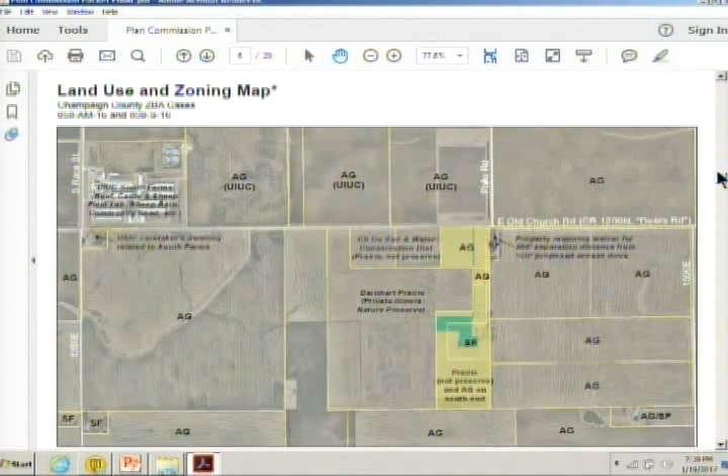It's worth noting that back in 2002, when the properties were subdivided amongst family members, the parcels involved belonged to two different family members, both listed as petitioners: Donald Barnhart and Amber Barnhart. The properties were split without a required subdivision submitted to the city, so there are issues of two of the parcels not being...

compliant with the city's subdivision ordinance. One parcel is too small; it's only 1 acre. It must be at least 5 acres, and it is not accessible to a public right-of-way. The same goes for that larger property that looks like a jigsaw piece, extending around the flag lot. That parcel also does not have frontage along a public right-of-way.

So the city has been working with county staff, as well as the petitioner, to ensure that a proper subdivision will occur in the event that the Champaign County Zoning Board of Appeals approves any rezoning or special use permit. The ways to remediate the non-compliance would be to make that one parcel larger, or by simply combining it with another parcel so all parcels are at least 5 acres, and possibly combining them so they all have access to frontage along Old Church Road.

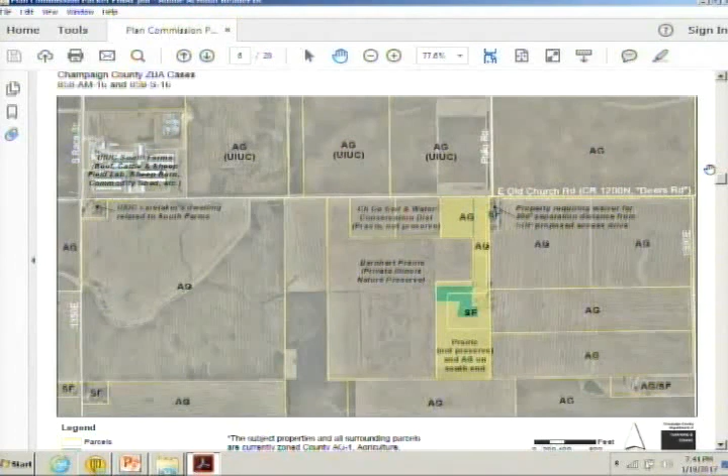All the subject properties and surrounding property are zoned County AG1 agricultural. The petitioners are requesting to rezone the subject properties to County AG2 agricultural. The distinction is that County AG1 is strict agricultural use, designed to allow things like farming and open space.

AG2 is meant to allow more commercial type uses on agricultural properties that are, make no mistake, of a rural nature, such as an event center or a farm supply store or things of that nature. So rezoning to AG2 would open the properties up slightly more to other commercial uses. The reason the petitioners are requesting the rezoning is because the use they would like to propose, which under the Champaign County zoning ordinance is determined as private indoor recreational development and outdoor commercial recreational enterprise, is only allowed in AG2 as opposed to AG1.

So they submitted a map amendment, rezoning application, as well as a special use permit application, to be heard concurrently, with the special use permit to be approved only after the rezoning application is approved at the same meeting.

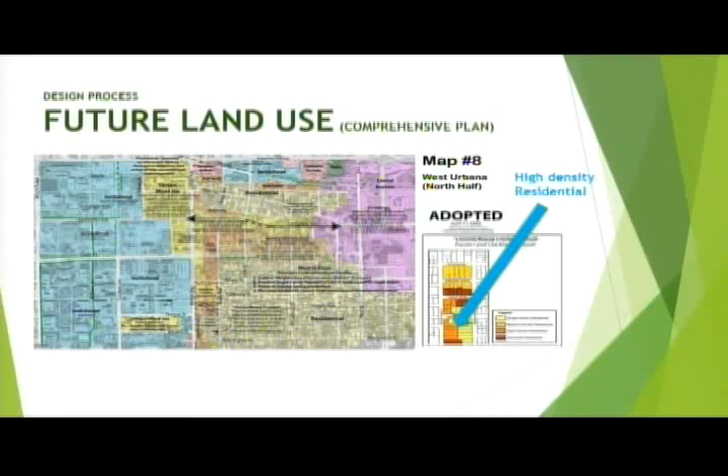At the same time, this neighborhood, or the location of this particular property in relationship to the greater neighborhood, this is a neighborhood that...

is also talked about in the comprehensive plan as needing to have its character preserved. And the character that is there is one of lower density.

It's not a high density area, and so we have these forces kind of coming together, where we have a tendency for there to need to be some sort of transition...

between the campus area and the lower density residential area. And of course, this property is right where those come together. So there are some challenges.

So what we have tried to do is to keep all the concerns in mind, not only for the developer but for the neighborhood people and the city.

So there are several things we had to balance with this, but what we're presenting is our best effort to try to keep all of these things in balance.

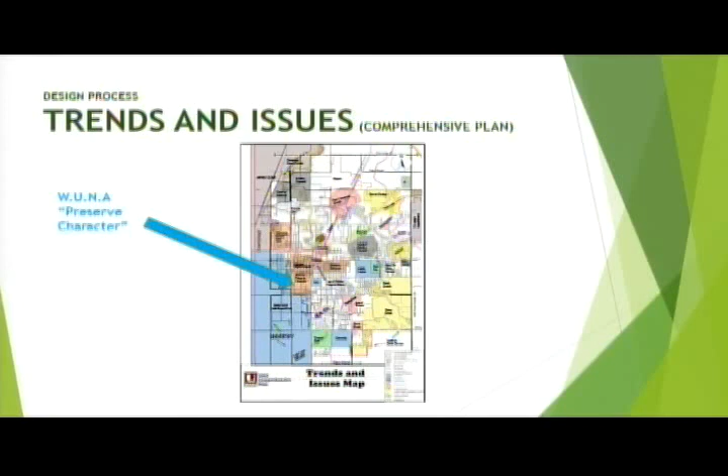The last time the project was presented, it was a larger size. We've done some things to reduce the size of the project, number one. That was a big concern.

There are some other issues we'll touch on that we've tried to address that were of concern last time as well. But just to make you aware, we have used the Lincoln Busey design guidelines, the corridor guidelines, to help...

develop the exterior look of the building and the size and some of those other features.

We'll get into more detail with that later, but we'll start with the building plans. So to orient everybody with this location, what we have up now is an overall 10,000-foot view of the area.

Lincoln Avenue is running north-south. Nevada Street is just to the north of this parcel. This is an assemblage of properties that's kind of an L shape. The bulk of it fronts the corner of Lincoln and Nevada.

Of course, directly across the street is predominantly university structures. And then directly surrounding is a fraternity and another multifamily to the south, multifamily to the north.

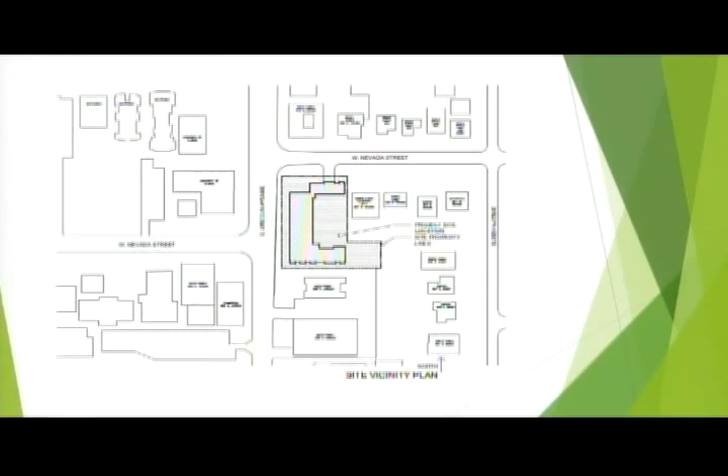And then, of course, getting over onto Busey, you start to get into single family. So it is kind of a mix, as Jacob was touching on, of different forces coming together here on this particular strip, directly fronting Lincoln.

Zooming in further, an enlarged view of this plan—I'd call this a ground level plan and a site plan. Lincoln is on your left, running north-south, and Nevada is on the north.

The building size previously was approximately 80,000 square feet. The current building design has been reduced from that by over 50%—it's about 38,000 square feet at this time. Most of that is because the height of the building has been reduced as well. We'll look at some elevations and exterior views later that'll demonstrate that, but in general, the size of the building has come down.

In terms of how the building is situated on the site, one of the first things we tried to do was preserve this very large, mature tree at the corner of Lincoln and Nevada. Thinking about the character of the neighborhood, one of the major aspects is the mature trees and the population of those types of trees there. So this seemed like a no-brainer that we should keep that tree. We've maintained a distance away from it so we can construct our building without harming it, so it stays. Actually, it's developed into a nice little place at the corner where residents and the neighborhood can pass through or stay and appreciate it.

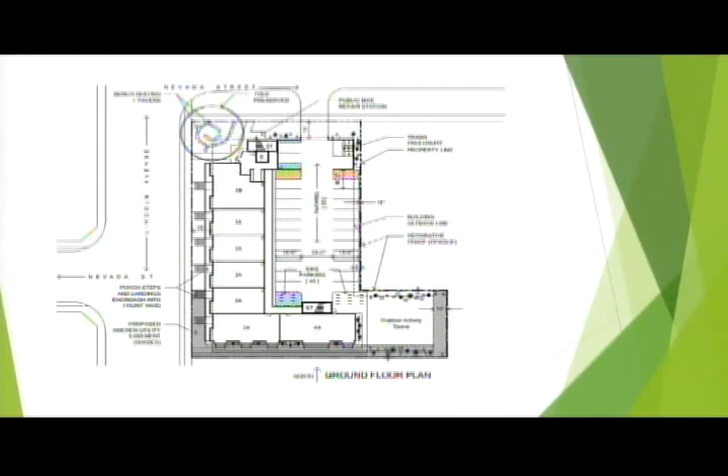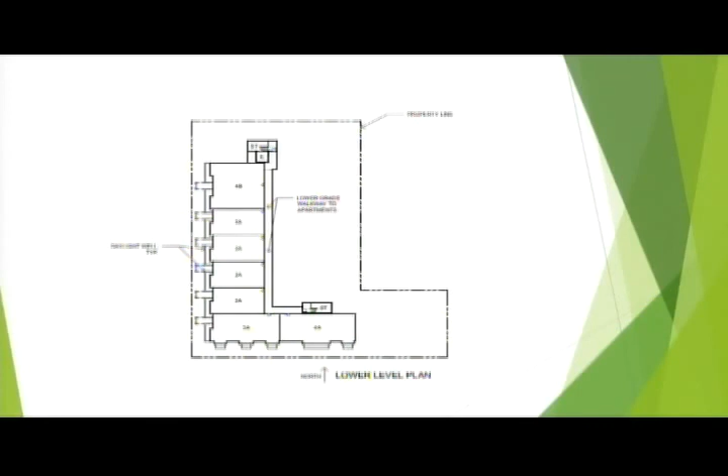We were calling this a 3.5-story structure because the first level is about a half story above the surrounding grade. There's a level submerged below grade, which again you'd access by elevator or stairs, and then there are 3 floors above grade.

Getting back to what Jacob touched on about exterior appearance—let's face it, this is an eclectic mix of structures in this neighborhood and area. On the west side of Lincoln, it's predominantly university, as I mentioned, but going on the east side, further south and further north, you have quite a mixed bag of structures and architectural styles, ranging from English Tudor, Greek Revival, quasi-Queen Anne, and Craftsman—just about everything.

It's all mixed together in one eclectic mix. So we thought we would take a walk around the neighborhood. We did extensively, and we kind of put our hearts into this in terms of finding some things that we could respectfully borrow.

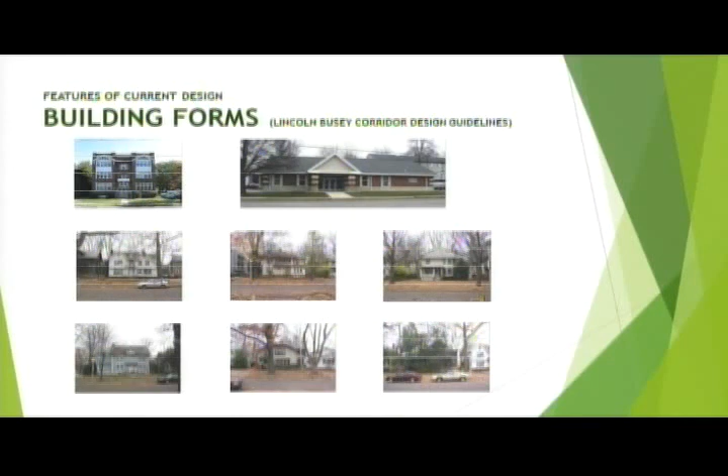So with that, we tried to take some of those elements, and segueing into looking at some of those examples, we felt it was important to use some of those materials as well. There's cedar shingles in some areas, others mostly asphalt shingles, which is durable and makes sense. Brick veneer is predominant on a lot of structures, so we tried to incorporate that as well.

Some of it goes all the way up, some are different colors, and we tried to use that feature extensively. The other thing is some of the older homes in the neighborhood have a base on them, a water table I'd call it, that's either stone, brick, or other materials. So we tried to incorporate that too, as a design feature to complement and respect the vocabulary and context of the neighborhood and streetscape.

And lastly, there's a mixed bag of shakes, shingles, siding products, paneling, wood, stucco, and other things. So we were trying to use some of those as a key component in how to break up the facade of this building and make it an interesting rhythm, so it's not just a plain facade, and incorporate those elements.

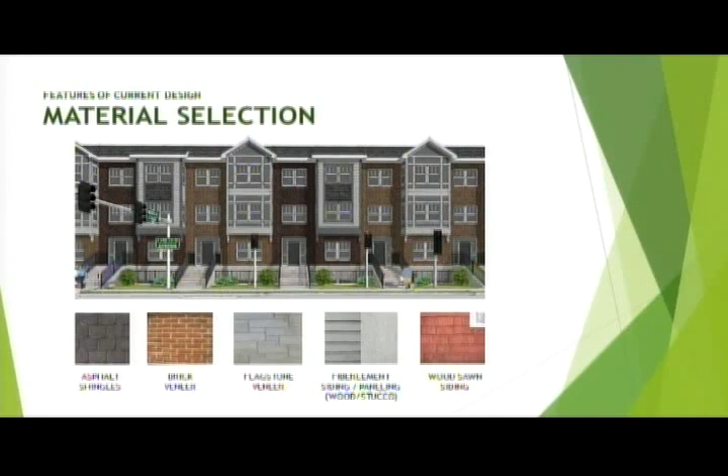That was kind of an advantage, to have that range of materials, because we know one of the desires of the guidelines—the Lincoln-Busey corridor guidelines—is to have facades that are well subdivided and have variety, not just monotonous. So we've utilized a good mix of those materials on the facade, and also used some of the forms we noticed around the neighborhood, namely the projected bays and gable roofs.

We've got bracketing shown that kind of harkens to the building to the south on Lincoln, and those types of features, along with brick. In addition to that, the stoops help this feel more like a group of smaller structures instead of one large facility.

So the views that we're showing are obviously the most prominent views. This one on the screen currently is of the Lincoln Avenue facade, looking east from the intersection with Nevada on the west side of Lincoln.

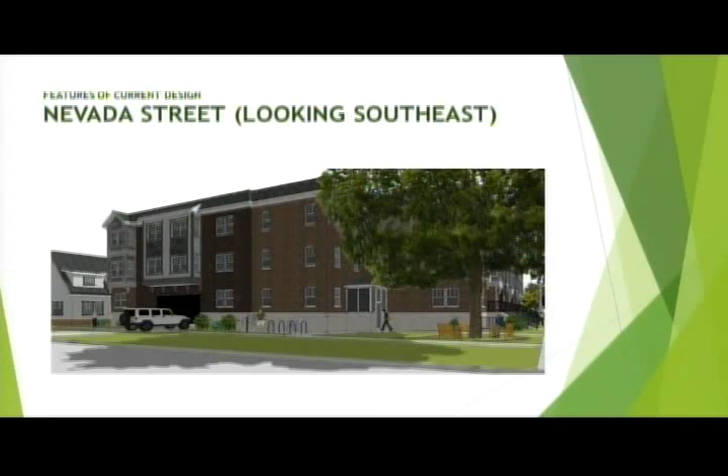That entrance is kind of overshadowed by this really nice tree. We feel like that space with the tree there is really nice, and there'll be a lot of nice shade—it'd be a really nice place to go.

We also would intend to develop the grounds around the building with a lot of nice landscaping to complement the rest of the neighborhood, and to kind of soften the base of this building.

We also have gone out of our way to create more bike parking than is required in the zoning requirements. I believe the number of bike spaces required for this project is 15, and we've actually provided 40 spaces. One of the places we wanted to provide parking is along Nevada. In addition, we'd provide a bike repair station available to the community, because we're trying to promote the use of bicycles over vehicles.

This graphic is a two-dimensional orthographic view of the elevation along Lincoln Avenue to illustrate the height comparison to the structure to the south at 808 South Lincoln Avenue. The proposed structure for our design is 40 feet to the very top of the utmost part of the roof.

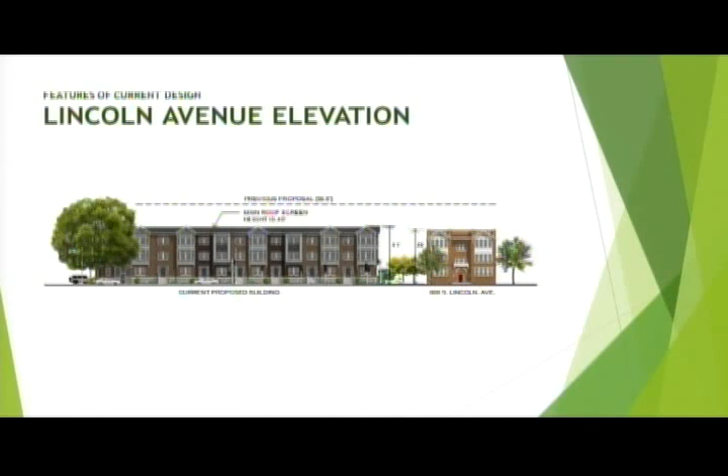The waiver being requested, the text of the proposal said 43 feet. I don't believe we would have to ask for 43 feet because, as I said, the actual roof height is lower than that. But anyway, that comparison is along Lincoln Avenue.

To show the comparison in height along Nevada, the next adjacent structure is about 32 feet, with a gabled roof. Along that side, the roof for our proposed design is actually about 40 feet. The previous proposal was much taller, proposed at about 56.5 feet.

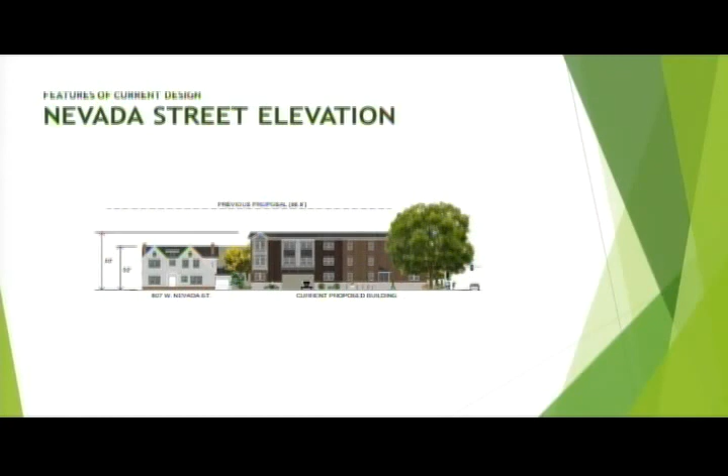Before I get into this next topic, what we've done here is try to take a project that is meeting a high density per the comprehensive plan, but we are trying to bring the building down with a half level below grade. So the below-grade units will still have windows, will still have little rails around these window wells that could be of a wrought iron character, something like that.

The stoops would have railings on them that would be long lasting, and each stoop would be just for one single apartment. I want to clarify, it would not be used for every single floor. That's just for one apartment.

That same apartment also has access on the back as well for accessibility reasons. So it is purely to try to connect the ground level units as best as possible to the pedestrian way, to give it more of a character and feel in line with some of the other structures in the neighborhood.

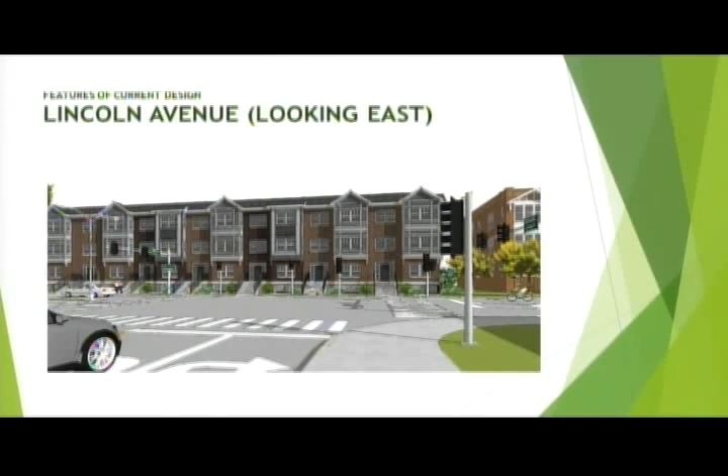So the next element of this project that we'd like to talk through is traffic strategies. I think it's an important feature of this project. The location of this project is right across the street from the university.

There are ideas here that we'd like to promote on this project: not the use of cars. We want people to use the sidewalks. We have mass transit, we have bike trails put up all over this city, and we want people to use it. It's what Champaign is doing, it's what Urbana is doing, and this is a development that could readily use pedestrian, bicycle, and mass transit.

So we like to tuck the cars behind. We don't want to see them. I don't want to see the cars, so we've tucked them behind the building, and we tried to make it concealed.

The items that we're going to emphasize here: we've got a reduction in vehicular parking spaces for reasons. We want to promote bicycle usage. We'd like to have a Zipcar station so that students or tenants can share and rent the car for the day to go to the grocery store and come back. There is on-street parking, and it is for permit in a lot of areas, and then there's also availability to off-site parking. So each of those items is something we feel strongly about, and that's why the parking we're providing is not completely per the current zoning for the number of beds and number of units.